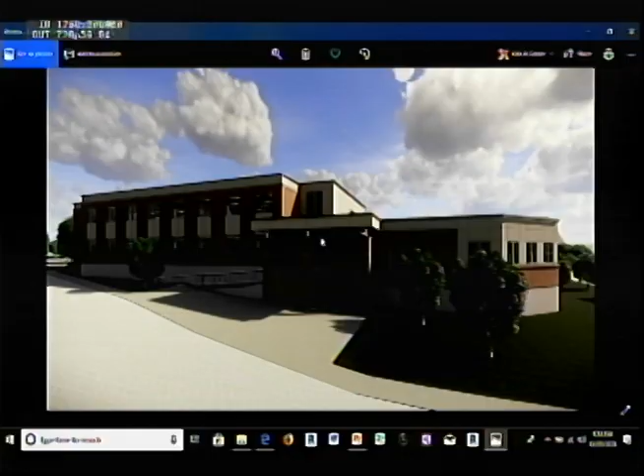The last item I have is, it was brought up by a contractor, to look at a different or alternate siding material that could save us some funds. I'm gonna have Jeremiah—you have the samples, right? We also have just a couple of images so you guys can refresh your memory on where it's going. So basically this is changing from one product line to another, changing from a different material basis. It does indicate about a $24,000 credit if we go with the alternative material.

Ekman's provided you with a couple samples and some images. What was proposed, as Greg mentioned, was by the subcontractor. It's called Hardie panel—most people are familiar with that. It's a fiber cement panel. I'll pass around these two samples. What is already in the project, what was bid and specified, is an American fiber cement panel.

There are some differences between the two products that I'll explain. I'll pass these around. The Hardie panel is the light colored one. They both come in a variety of different colors, but there are some specific differences and a reason for the difference in cost. The Hardie panel is not a through-color panel—it's a fiber cement panel with a factory finish on it. Hardie's the white one, so it comes with a factory applied finish.

On past projects where we've used it, we've painted it, but Ekman has told me they're comfortable with the factory finish on it. It's more of a low density product, made up of different binders than the high density panel, which is the darker one. You can tell the difference in quality just by looking at them—the darker one is much more dense. It uses a PVA binder. We've used the Hardie on many projects, but it is a lesser quality product—susceptible to freeze-thaw, can absorb moisture through the cellulose binders, so there can be some degradation of the product over time.

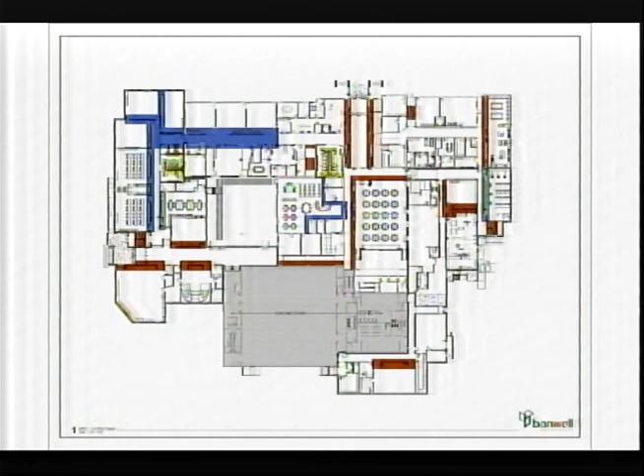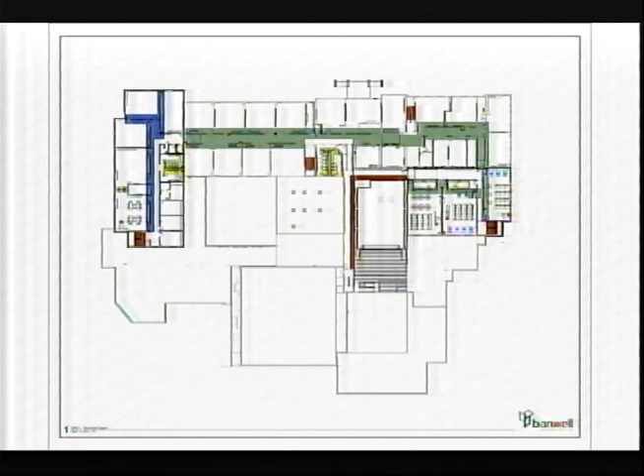This is just a color key of the upper floor plan — similar, core areas and stairwells in red, bathrooms in yellow, and differentiating high school from middle school. It's not like the entire corridor would be painted this color; I have some images to explain it a little bit more.

These are the floor patterns — I've already presented these for the addition, and you can see the floor choices here, this neutral palette, with the entrance doormats and the accent wall as you enter the building in a different tone.

And then we have where you can see a line of color that represents where we would propose an accent color. If it's not shown, it would be white. So you can see a yellow on this grouping here. And I think previously we were showing a red and a blue in the bathroom. We changed that.

And we have ceramic tile in the bathrooms. You can see the ceramic tile choices here. These haven't changed, and neither have the resilient base or the floor colors.

That accent blue is this blue, which is a different blue than you have now.

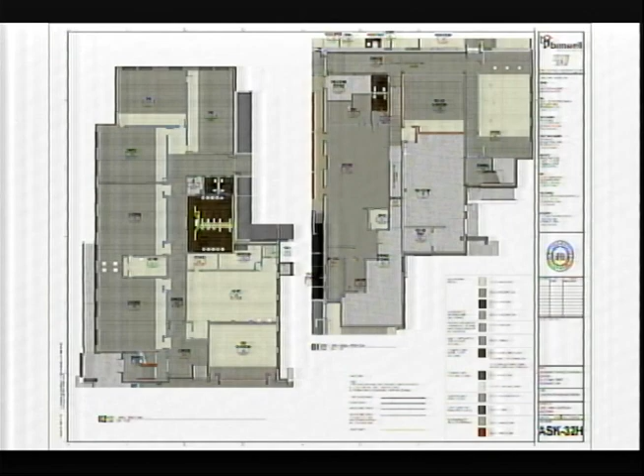And here is an image of the addition where we've changed the color of the accent in the core area. This is the red, and you can see the floor pattern changes in color. I'll just flip through these. This is the upper floor. You have some blue accent in the middle school and some green accent in some of the high school areas.

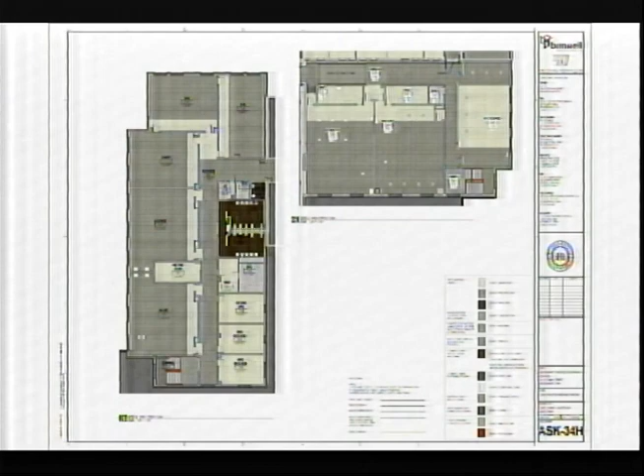And one reason we personally like the idea of maybe a green in the high school areas is because it's more of the historic section of the building where you have a lot of wainscoting and stuff. And if that's okay, we were thinking it would be sort of the reverse of this room, having the wainscoting and trim painted in green and everything else white.

This is the lobby where we have tile shown in there, and this was a different treatment. This was an alternate that was approved, which I think will be nice.

And this is one thing that you haven't seen, a two-toned tile. It's a larger format, like a 2x2 square tile in the lobby and entering into the cafetorium.

And here's the cafetorium floor pattern, which is a rubber that was also approved, with these smaller squares where you have the lighter color and then this red. I think it makes sense to associate the red accent wall color with this red flooring in that area.

In the stage, that's painted a matte black, pretty much everywhere.

The media area, I have an image of that to show you as well, which is carpet, and the admin area is also carpet, and that's another sample here that you haven't seen, for this interface product here.

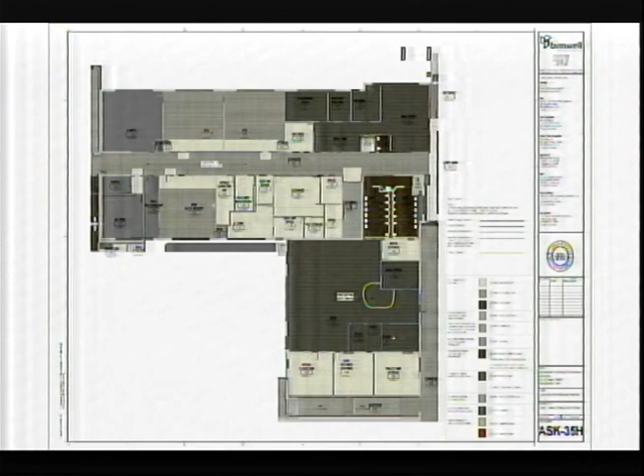And just to go through all the rest of the selections on this board, this was the plastic laminate for the cabinet faces. This is for countertops.

We needed to select another slip-resistant VCT on the ramps to go with these colors. So here's an image of that, similar to a neutral color here.

This was the gray rubber that's used in the stairwells. This is the walk-off carpet in the vestibules. Quarry tile in the kitchen, sort of this grayish color.

Toilet partitions, we're showing this color, and then this is solid surface. So this would be the color for the windowsills, and we also have another solid surface color that we're thinking would be nice for the countertops where we've called for it in the media, and there's some benches scattered around in the corridors. We would like to use that color as well.

And in the paint colors, the red core, this is a typical wall color. These are the two accents for the two different sections of the building, the toilet rooms, and here's another color for hollow metal frames.

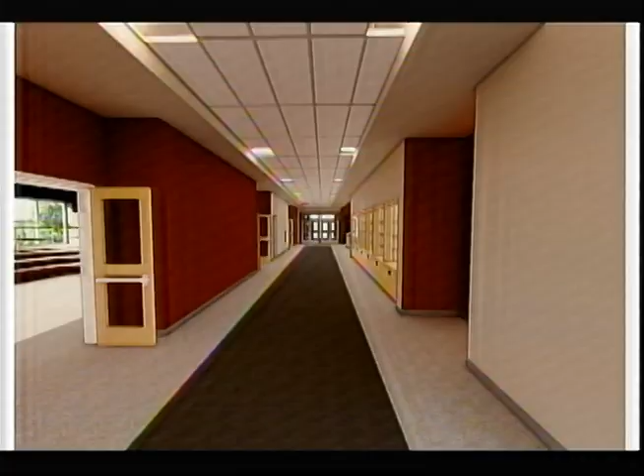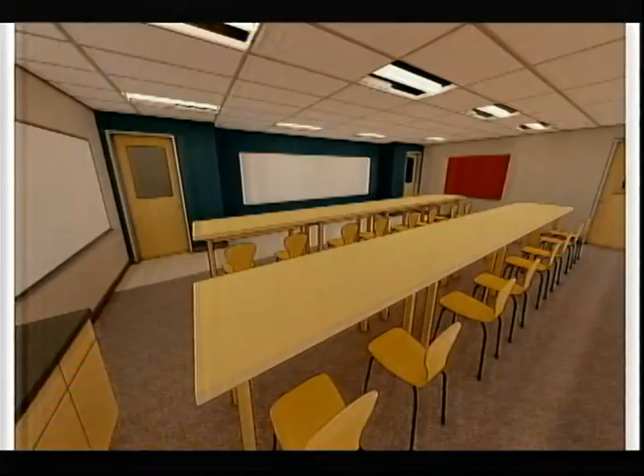This is an image of a middle school wing where we have an accent wall, and that carries into the other side of the classroom there. You can see the floor pattern change and just an accent wall there.

On the accent wall in the classrooms, I just wanted to point out that the students had a lot of input. These were some of the places where the students really sort of put a lot of input in and had a lot of good ideas. Jeremiah provided some great templates, but these kids really kind of put it all together. It was pretty impressive.

But they're willing to accept some form of blue in some locations, or is there an anti-blue? It's a certain blue, and we've moved past it.

Okay, so the blue we're seeing here, this blue is approved. Yes. That was my, I guess, I wasn't sure, I was a little nervous. What we're seeing here is representative of something the students have had input into.

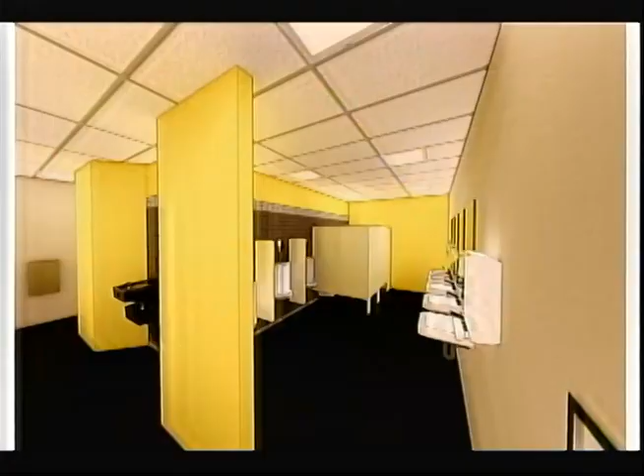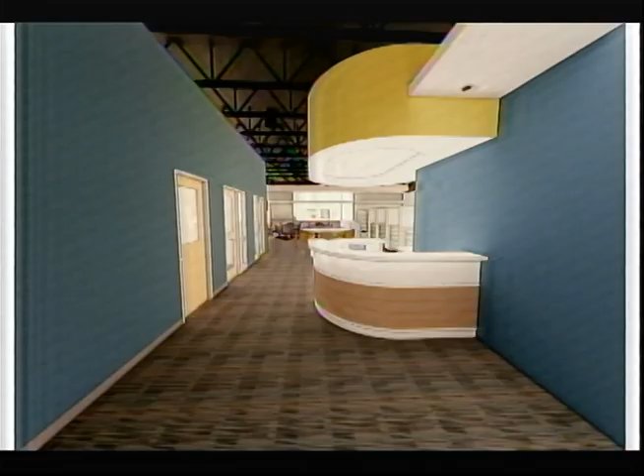Here's a bathroom shot where we have some ceramic tile on the wet wall. Sorry for this image, it's kind of misleading. The tile is a dark tile, so it feels like there's no floor. And that blue was carried into the media center.

This is where you have the carpet, and we have this colored soffit above. The media center opens up once you get past this, but there are some rooms as you come in.

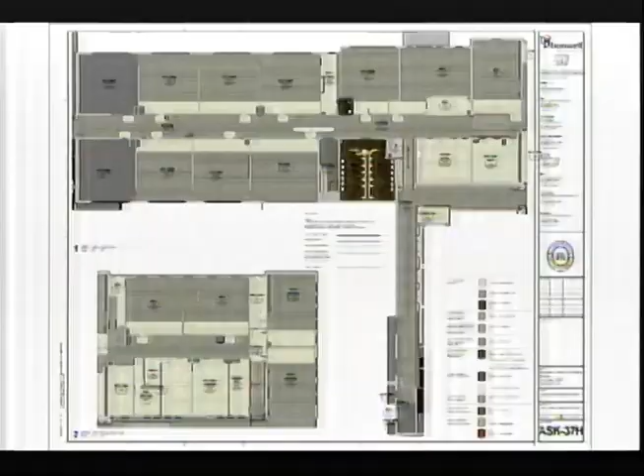For perspective, that essentially is the wooden hallway that currently exists. So if you go back to that last picture, that carpet there is what looks like that sort of bowling lane that goes down the middle of the building. Yeah, it's in this area here.

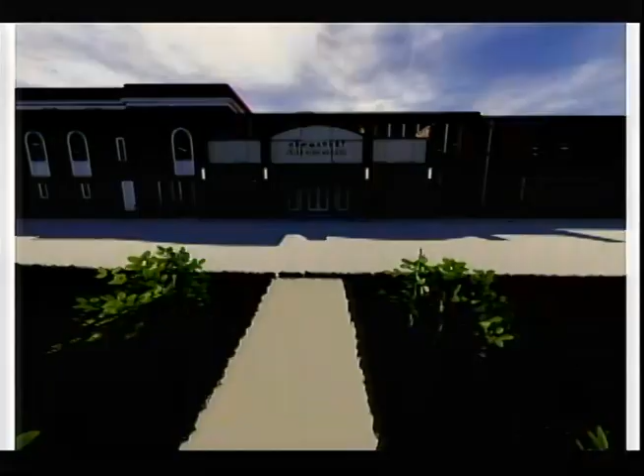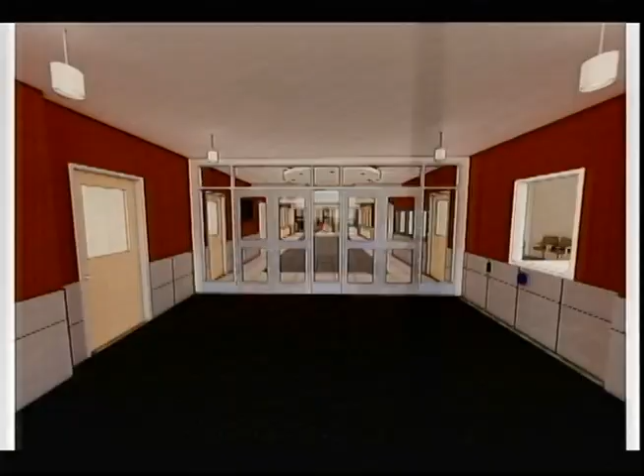And we also did a little, just a short little video. I got this program downloaded, so hopefully this will work... A little choppy, but you get the idea. Some display cases flanking the area, so it's gonna be much more open than what you have now, because we're taking out a lot of those rooms.

I love the fact that we have student input, and they recognize, I hope, that they can be blamed by the younger generation of students who come up and say, who chose these colors, you know. So I hope this is okay. There's always something.

The only other finish I didn't bring up was the weight room. I think I presented the weight room rubber before. We have to pick a locker color. I was waiting for actual sample chips because just the color and printout of the options was kind of difficult to select a color from. So I'd like to share those with you so we can at least try to match what you have now, or because the thought was that we would go with a gray locker, and I think that's okay to go with kind of a gray floor and gray lockers if in some of these areas we have like an accent color to sort of break up the monotone color palette.

Jeremiah, I assume all of this color selection and so forth and color alternatives are within our budget. Yeah, these are all stuff that was specified, and there's no upcharge for any of these specific colors. The fact that we're doing multicolors here and there is not a, I don't believe so, it shouldn't be.